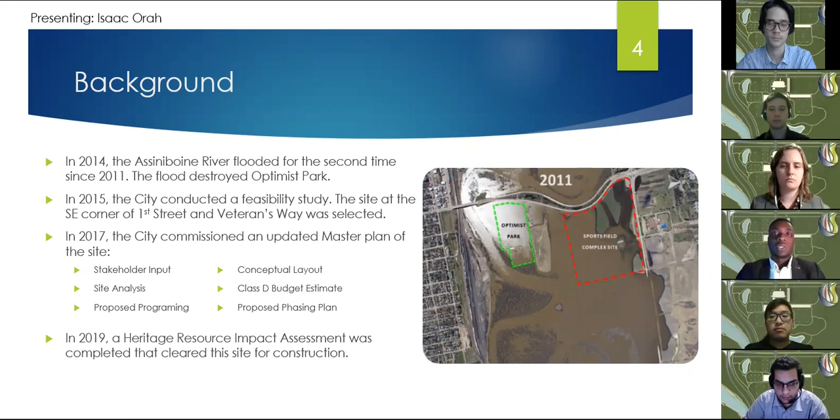The site's key features include active facilities such as soccer fields of varying sizes, two cricket pitches, disc golf adjacent to the ponds, an event space, and a playground. The buildings include the clubhouse and maintenance garage, and transportation features include on-site parking for 400 vehicles and active transportation paths. And with that, I'll pass it off to Anthony.

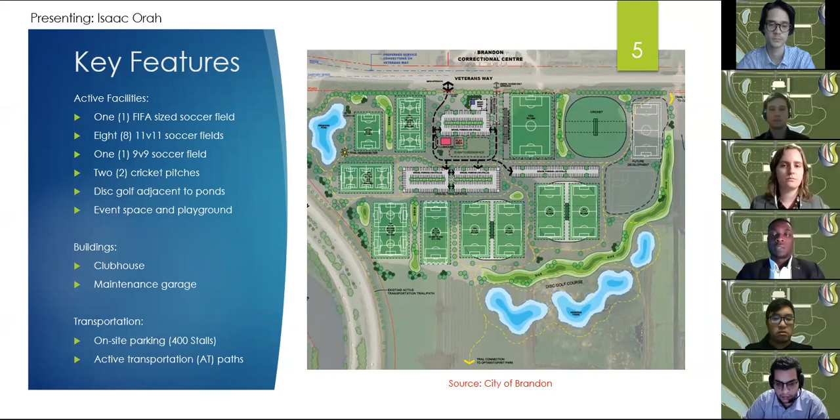We'll talk about the geotechnical works. Our geotechnical group was involved with the designs of the following structures. We designed the dike for a 1 in 300 year flood event, proposing to construct it from locally sourced clay fill, which is both feasible and cost-effective. We also designed the foundations for both buildings: shallow footings for the clubhouse and a slab on grade for the maintenance garage.

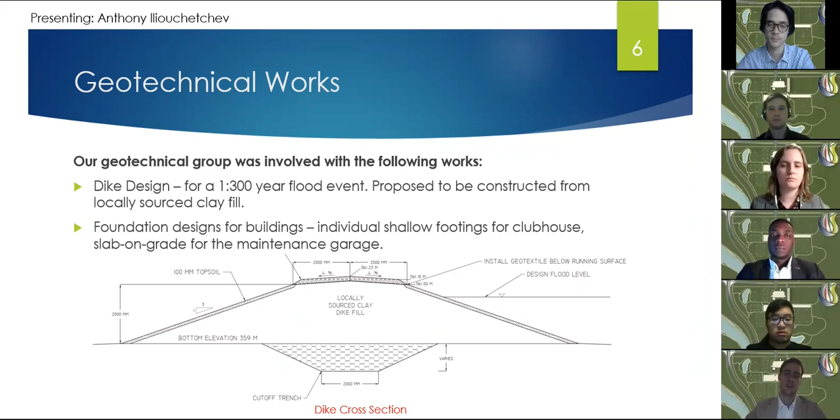At the bottom of the slide you can see a cross section of the dike, but a more detailed drawing is provided in the final report. We also designed the pavements for the site access roadway, emergency access roadway, the parking lots, and the sidewalks and trails, with a sample drawing provided on the bottom of the slide. Last but not least, we graded the site to ensure drainage requirements are met, and balanced the earthwork cut and fill volumes, achieving really good results.

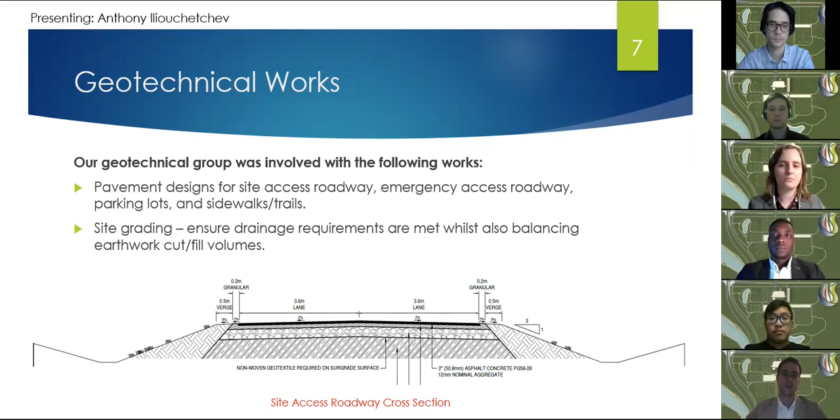Passing it off to Zach to talk about the hydrotechnical component. Work related to land drainage included the design of a major and minor land drainage system and 2 retention ponds. The hydrotechnical team conducted a study of the existing site topography and designed the system to direct precipitation runoff to the retention ponds.

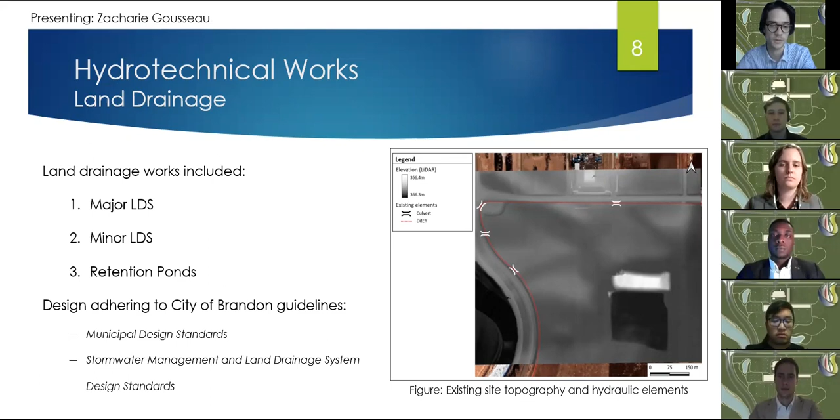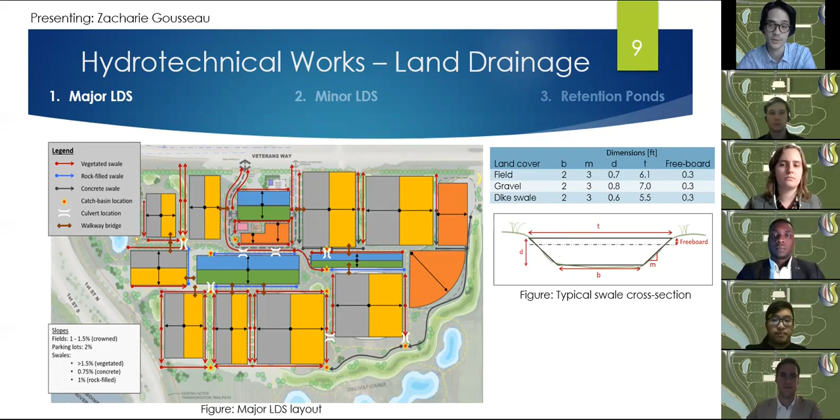I'll give a brief overview of these three elements. The major system is comprised of a system of swales that run throughout the park, which move water from the fields and parking lots to catch basins, and was designed to minimize elevation changes to allow the minor system to drain into the retention ponds without the need for pumps.

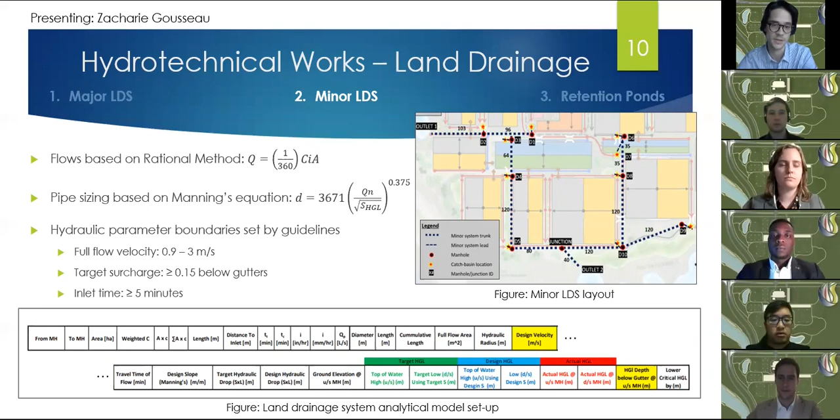The minor system was first designed using an approximate analytical method based on the rational method and Manning's equation, with City of Brandon standards used for design criteria. The behavior of the system was then verified using an EPA SWMM model.

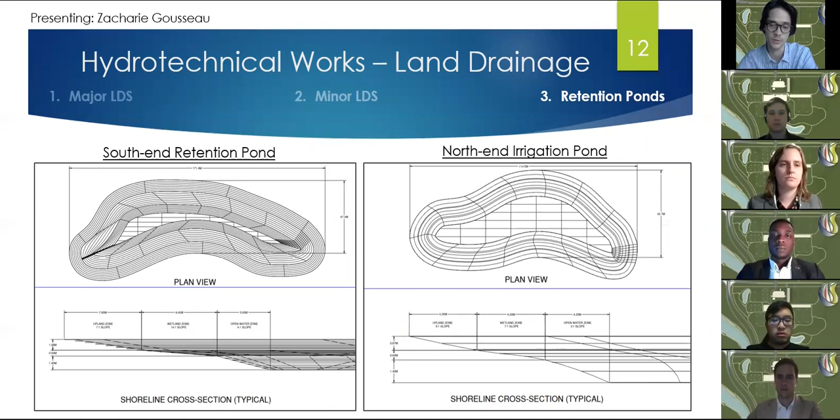Two naturalized retention ponds were designed, including the size, cross-section details, and outlet structures, designed to retain storm water as well as improve water quality before being discharged into the Assiniboine River. The behavior of the ponds was modeled in SWMM to ensure they could handle the 5-year and 100-year storms with appropriate drawdown time and freeboard.

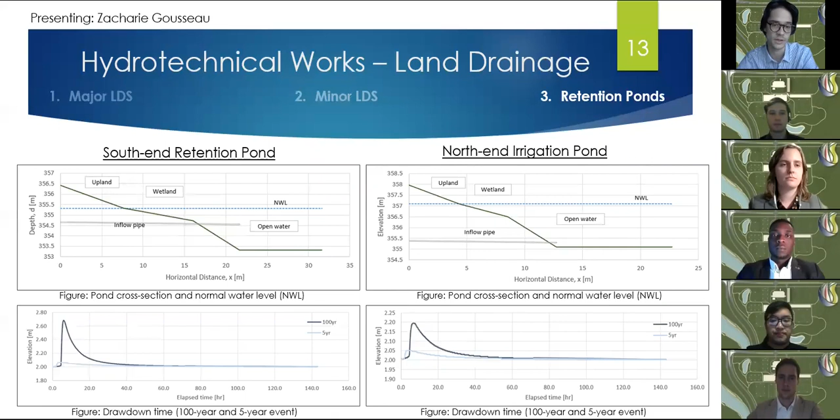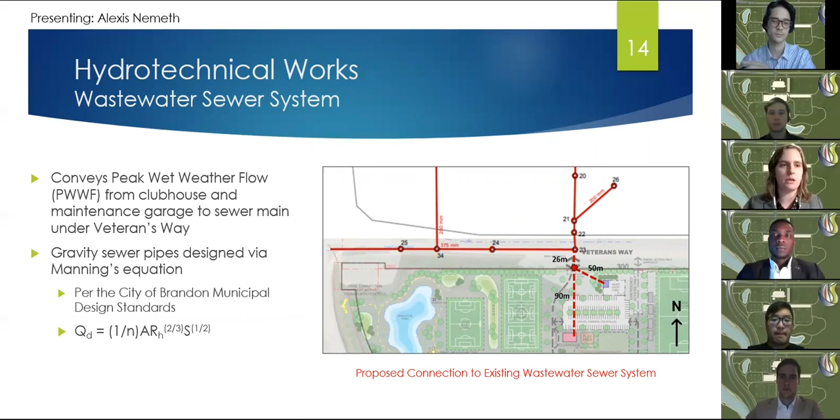Now I'll let Alexis discuss work related to water services. First, for water services, we have the wastewater sewer system for the site, designed as a gravity sewer. It conveys the peak wet weather flow of wastewater from the clubhouse and maintenance garage to the sewer main under Veterans Way. The pipe sizes and slopes are determined using Manning's equation.

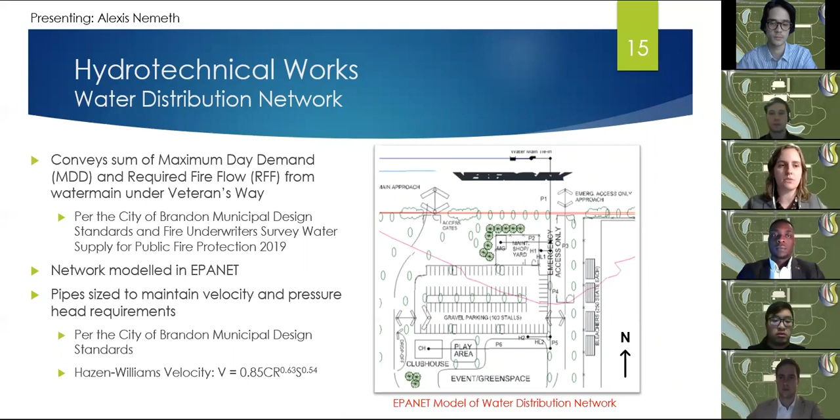Next up is the water distribution network, which routes water from the water main under Veterans Way to the clubhouse, maintenance garage, and 2 fire hydrants on site. The design flow for the system is the sum of the maximum day demand and the required fire flow. The network was modeled in EPANET with pipe sizes set to maintain guideline-specified velocity requirements and pressure heads.

Lastly, we have the irrigation system, which waters the sports fields on site. The irrigation pond in the northwest corner of the site acts as the primary water source for the fields. A drought simulation indicated that it was necessary to use the Assiniboine River as a supplementary water source for the system. The whole system was modeled in EPANET, and the pipes were sized so as to maintain required pressure heads at approximate extreme sprinkler head locations.

And that's all for water utilities. So now I'll pass things off to Naier for the transportation elements of the project.

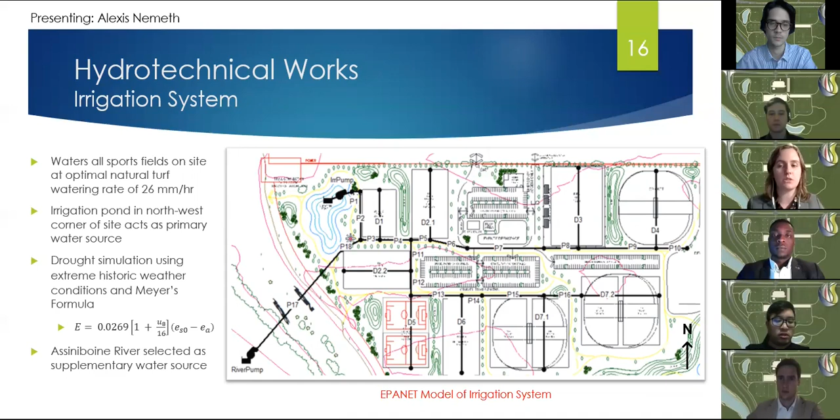Thank you, Alexis. For the transportation section, we started with a traffic impact analysis where we determined the level of service of First Street and Veterans Way using Synchro for each lane, and the lowest level of service lane had level of service C. Additionally, the level of service of the proposed intersection post-transportation design was at level of service A.

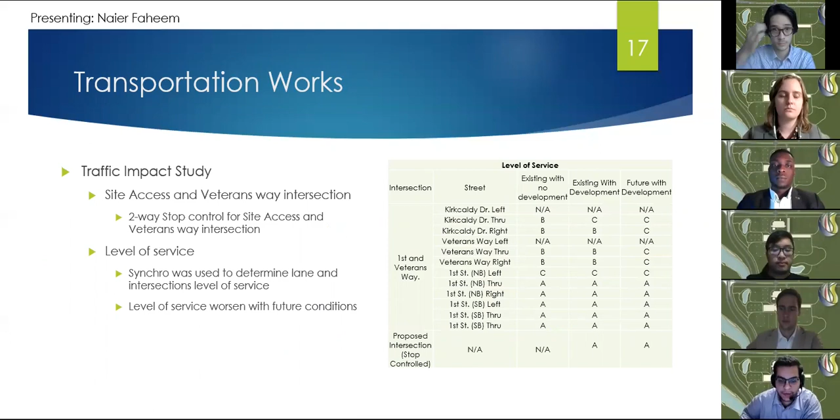Now moving to the design phase, we propose adding a road painted median to accommodate for a left turn lane, which will result in a higher level of service and safety.

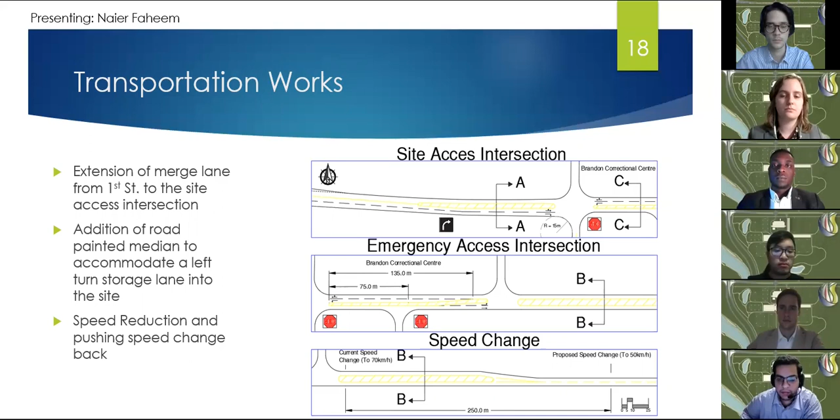Additionally, we extended the merge lane from First Street to accommodate vehicles that are turning right into the site while maintaining the same traffic going eastbound.

We have designed 4 different parking lots that will total 400 vehicle stalls, where each lot will accommodate approximately 100 stalls, including 7 to 8 handicap stalls, totaling 31 handicap stalls for all parking lots. Finally, we designed a multi-purpose trail that is a little above 3 kilometers long.

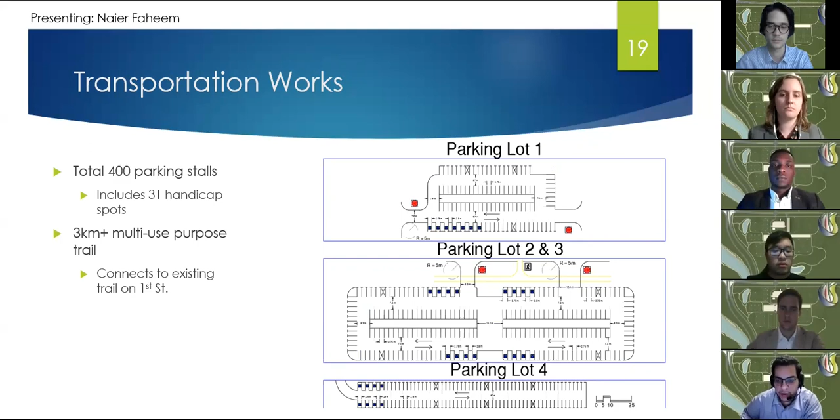With that, the transportation section concludes, and I'll be passing it to Toan for the structural portion of the project. Thank you, Naier. So the main structural works of this project is the clubhouse and the maintenance garage. Both these buildings are steel superstructure.

The clubhouse contains 4 change rooms, which are accessible from the outside, 2 washrooms, an office space, and event space. Additionally, there's a canteen area with a commercial kitchen. So we use the Manitoba building code to determine the design load in order to select the beam and column size.

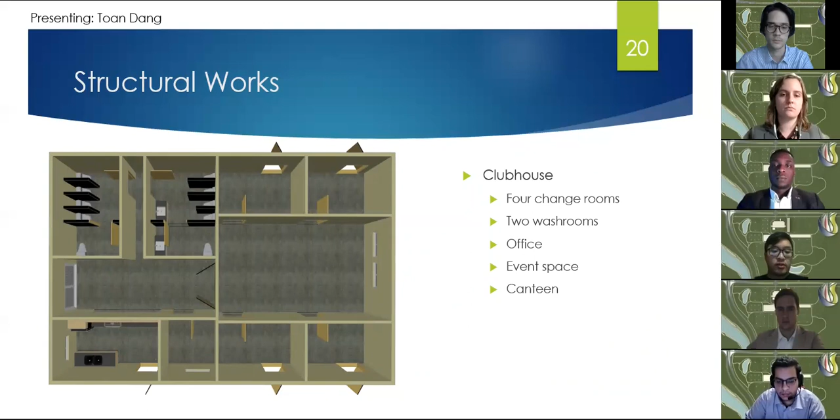The maintenance garage contains a spacious storage of 50 square meters for vehicles and equipment. Additionally, it includes an office space, a 10 by 12 feet overhead garage door. Same as the clubhouse, the Manitoba building code was used to select the beam and column size for the maintenance garage. I'll pass it off to Jesse to discuss the environmental work.

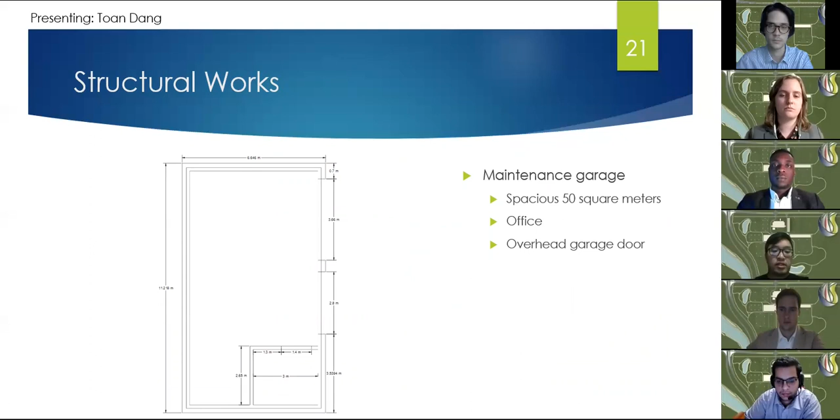Thank you, Toan. A preliminary assessment of the project's effects on the environment was conducted. Various valuable ecosystem components were considered, including the heritage resource, which was concluded not to be a concern. Sigma Engineering determined 4 applicable City of Brandon bylaws to which the project should abide.

Sigma Engineering is of the opinion that this is a Class 2 project per Manitoba's Environmental Act and is to be confirmed by the Environmental Approvals Branch of Manitoba Conservation and Climate. Federal regulations were addressed based on the project details. Sigma Engineering provided mitigation measures for reducing the pH of the soil and maintaining the water quality of the ponds.

The land drainage system, the water main, and the wastewater collection have been previously discussed by Alexis and Zach. Details for nearby gas, fiber optics, and power lines were addressed about their location and implementation. Installation of all utilities will follow their respective guidelines and standards.

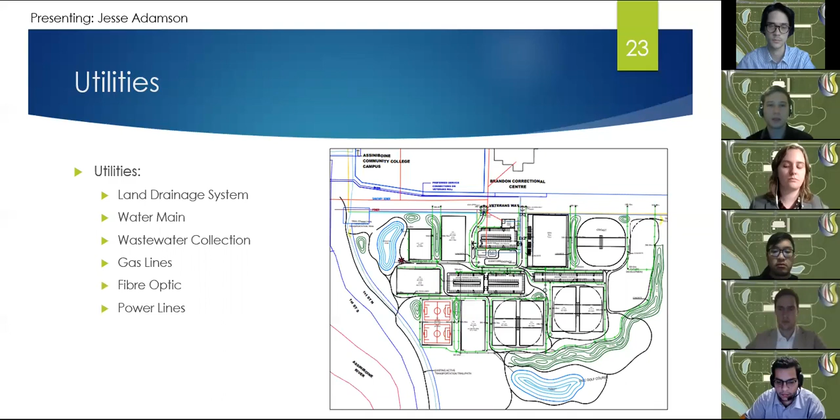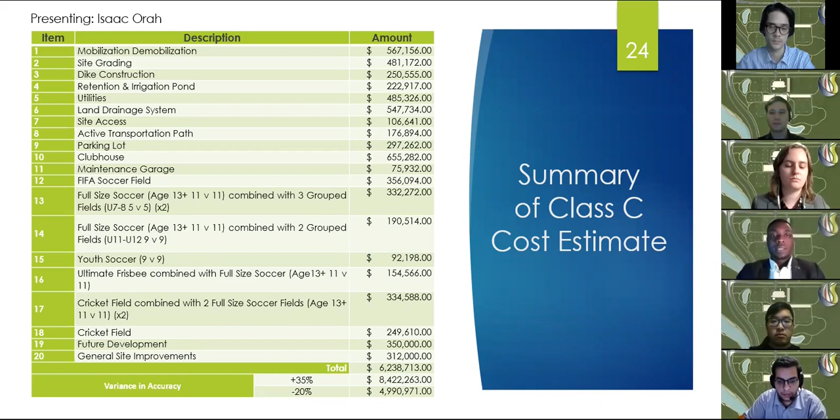I'll now pass it off to Isaac for the summary of the Class C cost estimate. Thank you, Jesse. So here we have a breakdown of our Class C cost estimate with rolled up items and detailed estimates presented in our report for a total project cost of $6,238,713. There is a variance in accuracy as to the Class C cost estimate of plus 35% to negative 20% as shown.